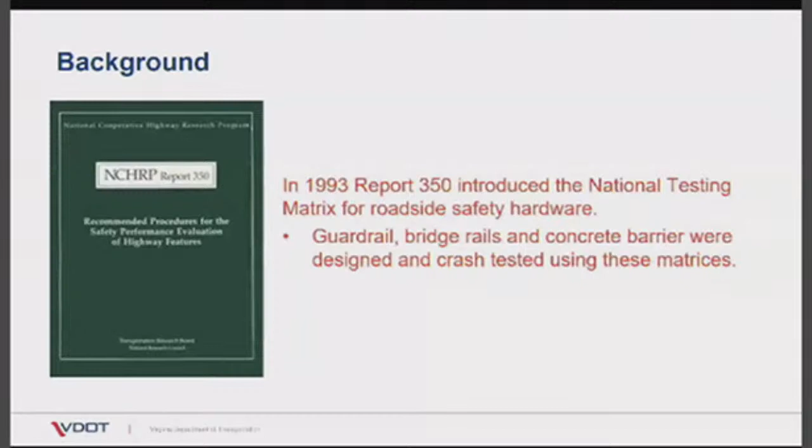VDOT at that time required that all new roadside safety hardware meet this criteria, and that includes our permanent and temporary concrete barrier. Then in 2009, AASHTO's Technical Committee on Roadside Safety, which also updates the Roadside Design Guide, published the Manual for Assessing Safety Hardware, or MASH. This committee is made up of volunteers across the state DOTs.

They relied on a project from NCHRP 22-14, or Improvement of Procedures for the Safety Performance Evaluation of Roadside Features. This report primarily focused on the changes of the vehicle fleet from 1993 to the current day. So if you think back to what vehicle you were driving in 1993 versus what you drive today, for me, I went from a little Honda Prelude to an SUV. It is reflective of the changes to the current fleet and the fact that the percentage of SUVs and quad cab pickup trucks have increased.

This manual used the knowledge gained from testing devices over the years and really advanced the science behind the crash testing. It added additional tests, with changes to the impact angles, including the reduction of the oblique end impacts for gating terminals and crash cushions. It was changed from 15 degrees to 5, and that is probably one of the biggest changes with MASH. The other change was increasing the size and weight of the test vehicles. For example, the light-duty quad cab pickup trucks in MASH are much heavier and higher in center of gravity than the heavy-duty pickup trucks from the NCHRP 350 study.

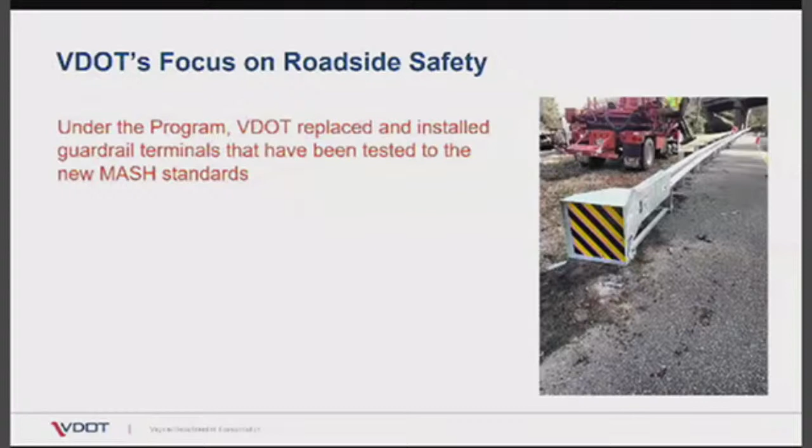Now on to items that are more specific to this audience. In April of last year, VDOT introduced the new standard TBC1, or the Freestanding Temporary Concrete Barrier. As you may have noted already, there is additional reinforcement and changes to the pin and loop connections between the barrier segments. There's also an additional required upstream and downstream anchorages. In addition, there's a requirement for embossing the manufacturing date. And this new design was tested to the MASH test level 3.

Now let's take a look at our next item to update, which is the permanent concrete barrier design. Pictured here is the F-shape barrier with a guardrail attachment. You can see the reduced post spacing in the attachments to stiffen the guardrail system and reduce pocketing where those two systems meet. This F-shaped barrier works by lifting the vehicle center of gravity to reduce momentum and redirect errant vehicles. This was tested under test level 3 under NCHRP and may not redirect the larger vehicles due to the height of the barrier, which is only 32 inches.

This is due to the overhang of those large vehicles like a single unit truck or box truck. In addition, it has a 3-inch lip at the bottom, which can accommodate an overlay, but the multiple slope shapes must be retained in order for it to work as designed.

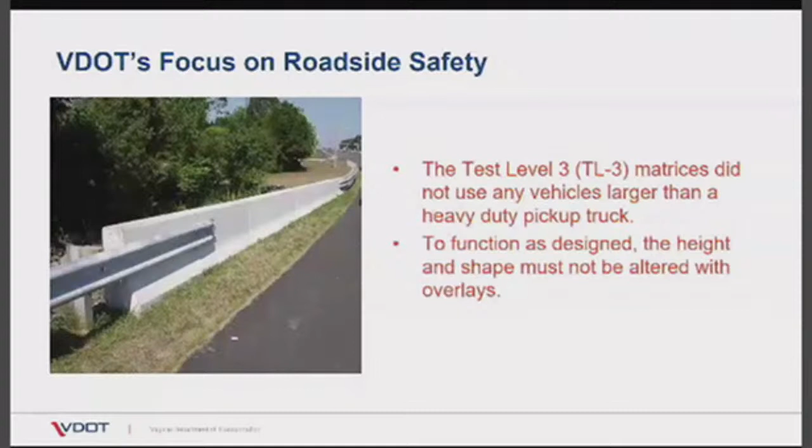So this is a picture of a constant slope barrier at Texas A&M Transportation Institute in College Station. California and Texas developed these constant slope barriers to meet MASH and to help redirect those larger vehicles. The testing that they have done has shown that a minimum height is needed to redirect those larger vehicles. The Texas constant slope is similar in performance to the Jersey shape, and the Caltrans is similar in performance to the F-shaped barriers that we have. There again, this taller barrier helps to resolve the issues with the overhang of those box trucks.

So as a result, VDOT is moving forward with adopting a 42-inch constant slope barrier. This provides protection for the current fleet, but also gives us the additional capacity for those larger vehicles like the single-unit trucks. Another advantage of the single slope barrier is that it maintains functionality even with multiple overlays, as long as the height remains adequate to redirect those larger vehicles. So in reality, it has the potential to redirect large vehicles such as box trucks or single unit trucks and operate at a test level 4.

In general, for high-speed highways, the single slope barrier is most appropriate to limit those rollovers, especially since much of the fleet now has side airbags to help absorb that impact and improve the safety of the occupants. The new concrete barrier standard will replace the F-shaped standards, and the old standards will be sunset at a later date that is yet to be determined. If you have questions or want further information, please feel free to reach out to Chuck Patterson or Matt Cross in our standards division.

I think I'm on take 47 trying to record this. I'm starting to think that it's harder to record than it is to do it live. But nevertheless, we'll give it a go.

We're going to talk about updates that happened in the year 2020 to our office practice and standards.

Part 1 is the preface, Part 2 is the design aids, which we also call the office practice. Then Parts 3 on are various standards. So Part 2, the office practice, has 33 chapters, so there's a lot in that. Today we're going to talk about updates that were made to Parts 1, 2, 3, and 7.

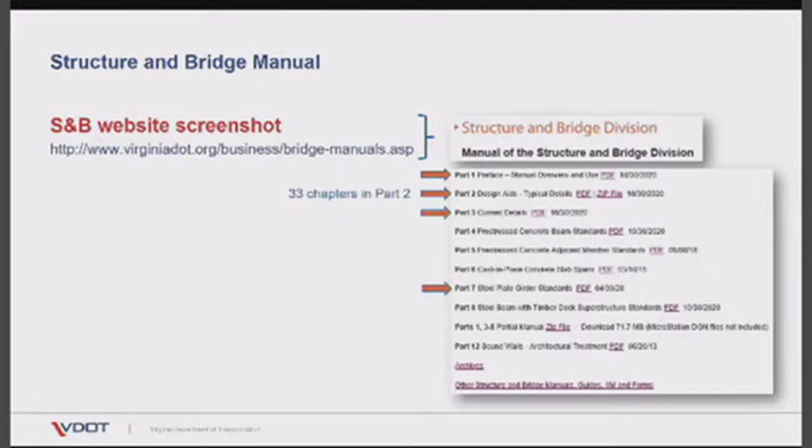Steel or concrete? As you're working on preliminary plans for new or replacement bridges, one of the key questions is, what kind of superstructure can you use? If conditions allow uncoated weathering steel, the Stage 1 report can compare steel options and concrete options. But if conditions do not allow uncoated weathering steel, approval is needed in order to use steel.

So this is a new requirement. It was added in April of 2020 to Chapter 11, the steel chapter. So keep that in mind when you're preparing your report and recommending a superstructure type.

Design waivers and design approvals. Who is the approval authority? This is all spelled out in Part 1, the preface. For design-bid-build projects, some design waivers require state bridge engineer approval or disapproval, and others are submitted to the district bridge engineer. The preface outlines which go to which.

Design approvals generally all go to the district bridge engineers. But new in October of 2020, all items proposed by a concessionaire or design-builder must be submitted to the state bridge engineer. So that is a new requirement.

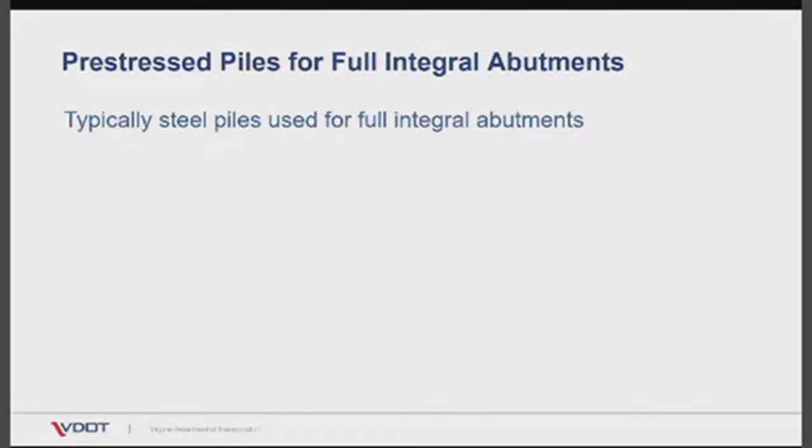Pre-stressed piles for full integral abutments. Typically steel piles are used in full integral abutments. Piles need a little more flexibility in full integral abutments, so that's why the steel piles are normally used. The office practice was silent on the use of pre-stressed piles. It's not that they weren't allowed, we were just silent on it.

So recently we added, in several places in Part 2, some guidance to help the designers think through, hey, will a pre-stressed pile work in this situation, and what are some things to consider?

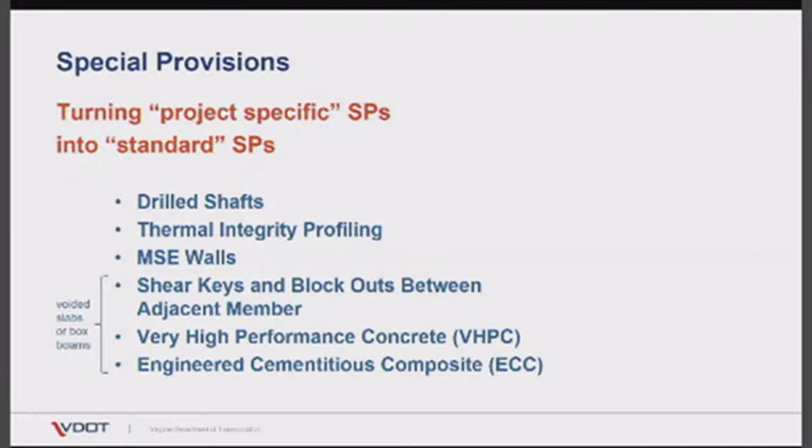Early on, there were several suppliers, but at the moment, there's only one known manufacturer of elasticized expanded polystyrene. There are several that supply and manufacture expanded polystyrene, but we need the elasticized version because it can compress and rebound. Because there's only one manufacturer that we know of, Construction Division and the FHWA consider it a proprietary product. So in 2020, we had to obtain a public interest finding from the FHWA in order to continue using it.

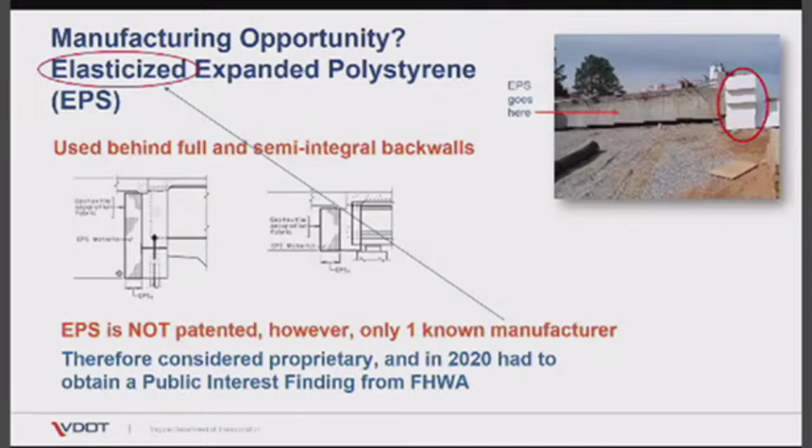So there's your manufacturing opportunity. If someone wants to get into the business of manufacturing this, well, there's very limited competition, and that would be great.

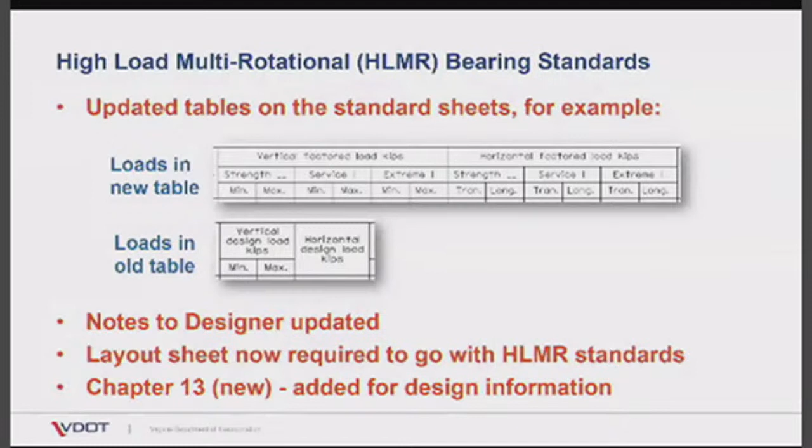Chapter 13, which is a new chapter, was added for some general design information. In April of 2020, we added Chapter 18, Earth Retaining Walls. Right now, the content is mainly focused on MSE walls. It contains the approved retaining wall systems list. This list used to be in Part 11, the geotechnical manual, and Part 11 has been disseminated through various chapters in Part 2.

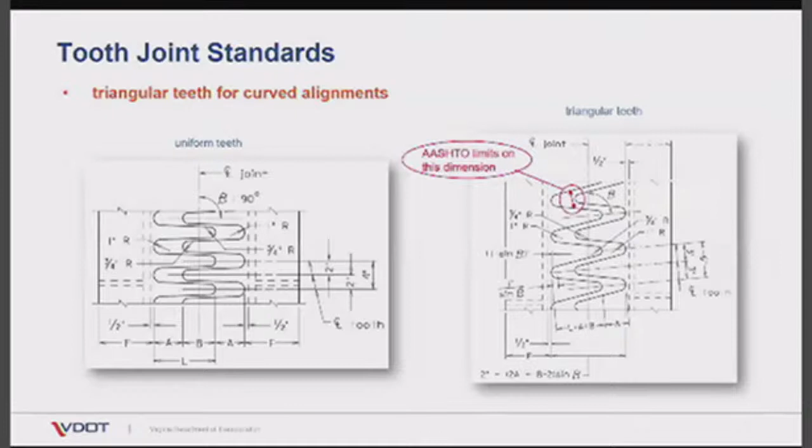One thing you want to pay attention to, though, if you are using the triangular teeth, is that AASHTO has some limits on that dimension circled in red. If you exceed those limits, you're not allowed to use the triangular tooth. Another reason the tooth joint standards were updated is the advent of Virginia abutments and Virginia pier caps. Most tooth joints will be used at either a Virginia abutment or Virginia pier cap, and in those situations, the trough membrane is not needed.

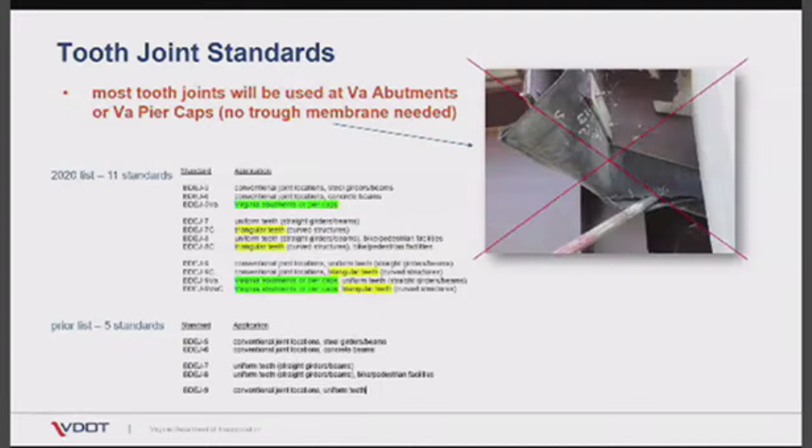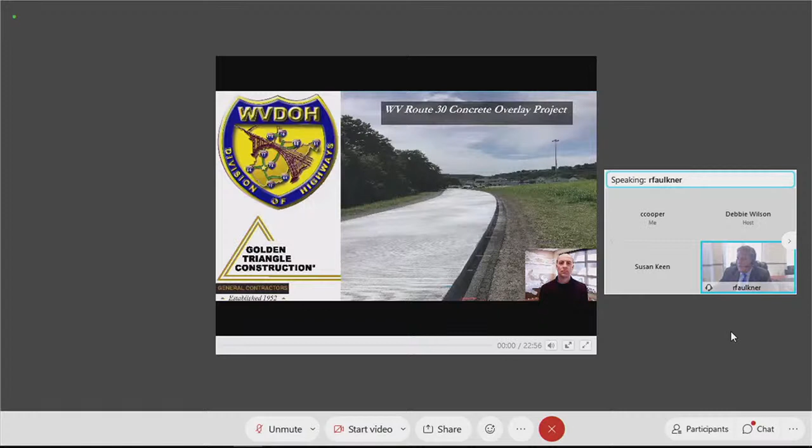Next is the West Virginia Unbonded Concrete Overlay Project, and the speaker today is David Sciullo with Golden Triangle Construction. He's been there for 23 years, from field engineer to vice president of construction. He oversees all field operations in their heavy highway division. He graduated with a Bachelor of Science degree in civil engineering from the University of Pittsburgh and is a licensed professional engineer in Pennsylvania.

Good morning. My name is David Sciullo. I'm with Golden Triangle Construction. Today I'm going to present on the West Virginia Route 30 concrete overlay project in Chester, West Virginia.

This is not a new technology. They've been doing concrete overlays for a long time. They did a few in the 1980s in Pennsylvania, and they've been doing them all over the country. However, in just the last 10 years or so, it's really been taking off throughout the country. And we were happy to be the low bidder on this project.

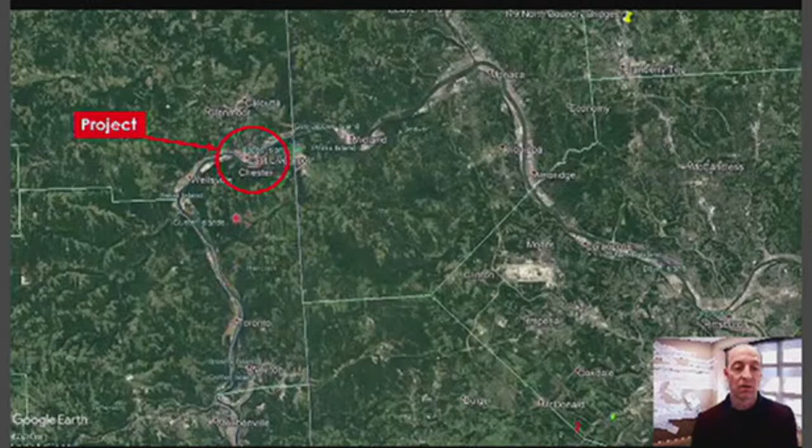The description of the project: like I said before, it's the first one ever in West Virginia. $4.3 million contract. The original schedule was April through August. The whole intent was to get the project done prior to school starting in September. We were still able to do that despite the rainy weather in April. We really didn't get started until May, but we were still able to get the job done before school starts. 20,000 square yards of 7-inch overlay on an inch asphalt interlayer.

4 interchanges, and also Route 2 was involved in the project. There was some preservation, patching on Route 2. There were some variable depth, full depth reconstruction at the tie-ins to the bridge and Route 2 and County Road 30, which paralleled the project. I'll explain that a little later. Minor median work. There was a concrete channel that was rebuilt, and the median barrier was also reconstructed.

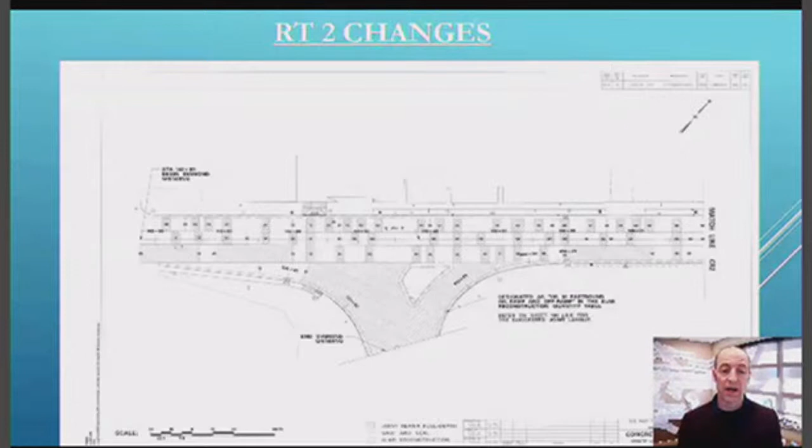So internally, we looked at some things we could do to help the project schedule, change some designs of the project, and approached West Virginia on these changes. The first one was Route 2. Now, if you look at the plan for Route 2, all those hatchings would be patches that needed done on Route 2. Again, there's a lot of patches on a small area of Route 2.

So we looked at it and saw, well, maybe we could reconstruct the whole thing for the same cost as it was to patch the roadway. I mean, the patches look like checkerboards. We thought we could do it. We priced it up. It was attainable. So we approached West Virginia with it and said, hey, we can give you a new road for the same price, and we're going to construct it the same way. Flagging operations while we're in that lane will be done the same way. It's just we're ripping out the whole road and replacing it with a new road, still saving the curb gutters that were planned for the project with some minor patches to those, and give them a new road.

Again, looking at an overview of the road, you have 3 lanes here. You had a parking lane and you had 2 through lanes. So we did them 1 lane at a time. We did the parking lane, maintained traffic on the through lane and the opposite lane. During work hours, we would flag one of those lanes to pave the curb lane, say. And then we'd move our way across the roadway and just keep shifting traffic as we did the work.

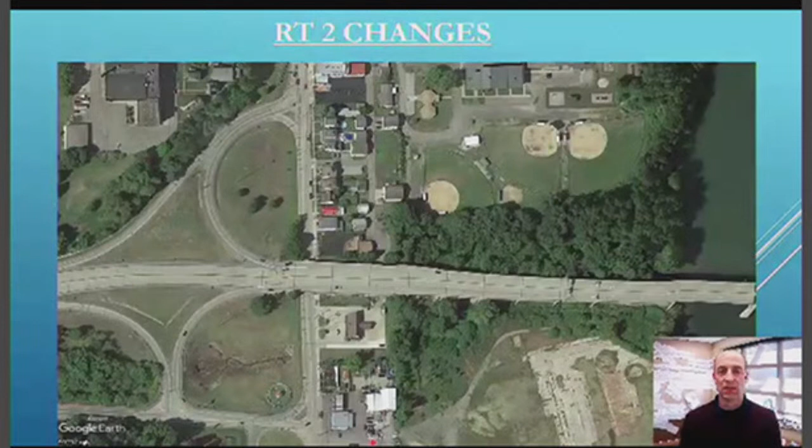Picture of what we did here. So this would be the parking lane. We saved the curbs here. Again, traffic's maintained here while we're working, flagging that lane. Then we'd open this lane up at night when we were done. Again, the curbs were saved. Here's a look at what it looked like when it was done. Again, brand new road for the same price as all those patches. Time-wise, too, it was similar time because the excavation didn't take very long.

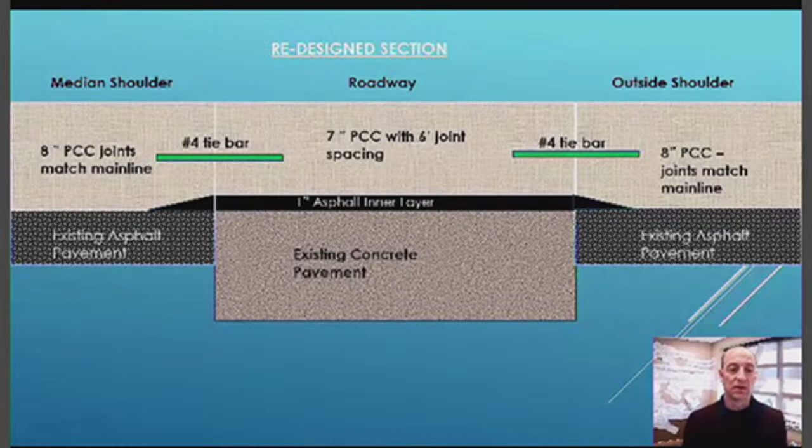Again, we discussed how we could maybe look at changing a few things, and this is what we decided on. Since we have a concrete plant on site, instead of doing the asphalt shoulders, we changed those to concrete for the same price as the asphalt shoulders. All we did was add tie bars to the shoulders and extend the asphalt inner layer, maybe a couple feet, tapered into nothing. Now you got 8-inch shoulders for the same price as 8-inch asphalt. It was a no-brainer for the department, and they accepted that without question.

Another change we made: we looked at the detour and the 9-day closure and how we could make this better. It was a 20-mile detour during those 9 days, not ideal, especially for the locals in Chester. They weren't thrilled about it, but they understood the project needed to get done. So we looked at whether there was another way to do this, maybe somehow maintain traffic while we're working. We've done this in the past doing overlays, maintaining 1 lane each direction.

So we came up with a new detour, a combination of a detour and single lane work. There was a parallel road along Route 2, County Road 30, a very capable roadway to handle the traffic. We looked at detouring westbound traffic onto that roadway and constructing the eastbound lanes using long-term single lane closures. The ramps were still closed per the contract, except the westbound ramps were closed during the detour, which eliminated a couple additional ramp closures. It also eliminated the incentive-disincentive clause, which eliminated some risk on our end but also saved the department money - they didn't have to pay that $90,000, assuming we got done in 9 days, which we still intended to do, though there was still some risk there.

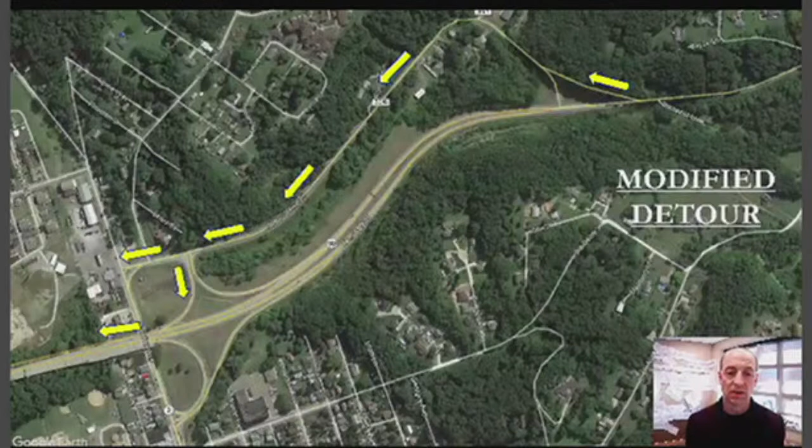So just to go over the construction, primarily overlay work - I don't have much time for anything else, but looking at the overlay itself: the first thing you had to do was go out and look at the existing pavement, determine areas that needed full depth repairs. Normally on a full depth pavement job, you'd look at areas with cracks and do full depth patches on new roadways or on this preservation job.

However, this is a little different. You'll see cracks on the roadway, but if the cracks aren't moving - if the slab has no movement - it's still okay for an overlay. However, if the slab has some movement or faulting, you'd want to replace that slab, patch, or do whatever's needed so there's no movement. Ideally you want a uniform surface underneath the overlay. So you go through, look at the areas, and proof all the pavement - we did it with a loaded tri-axle to see if any areas needed full depth patching. Very little actually needed it. Also, areas with potholes or small repairs needed fixing - you'd use a fine asphalt sand mix or cement grout to fill those depressions so you'd still have a uniform section underneath that inner layer.

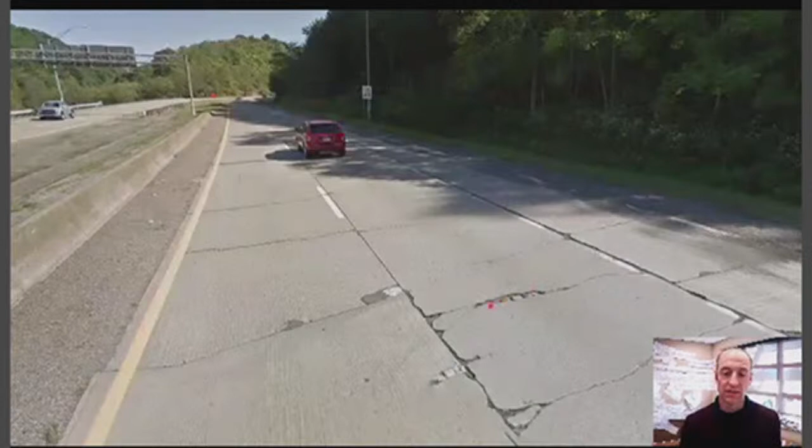So what you would do is clean these out very good and either use that asphalt sand mix or concrete grout, which we elected to do because we had a batch plant on site, so we could batch the grout ourselves. We'd go through there, clean them out, and put grout in prior to doing the asphalt interlayer.

Another look here, you have some areas here. Again, you're not touching these cracks, just filling in the holes. I was trying to search for some pictures of that grouting operation and didn't really have any good ones to share with you, apologize for that.

So looking at the asphalt, just again typical 1-inch asphalt placement, no different than regular asphalt. So you place that 1-inch interlayer. Then on a slip form process, just like regular concrete, you're placing the concrete in front of the paver, placing a 7-inch overlay. We extended this asphalt 1.5 foot or so beyond the limits.

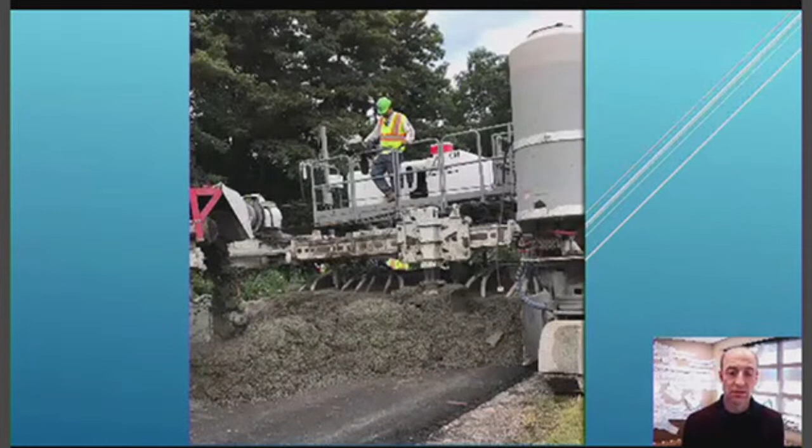Here's another view of it. And here we did stringless paving. You can see the prism here. I'll explain that in detail a little bit later.

Get another view of the paving. This would be westbound, here's the eastbound lanes. You can see the edge of the asphalt on the right side here.

This guy here, most important guy right here, is the dump guy. He has to make sure that he doesn't overload the paver. Again, critical to get uniform head in front of the paver to maintain uniform pressure in the front, so you have consistent, smooth concrete coming out the back. He's communicating with the paving operator to make sure he's not overloading the paver, and you don't want to starve the paver either for concrete, but making sure you have consistent, even head in front of the paver.

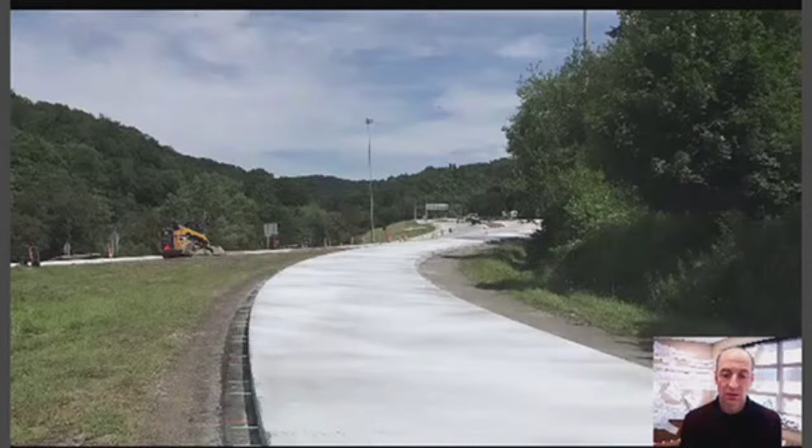Here's a look at after paving, we got some excellent rides on this, 50s, 60s on this overlay, minimal grinding just up at the very ends where we did the tie-ins. We had some grinding on some handwork sections at the very ends of the job. Again, you could see the asphalt interlayer went a little wider here.

And the tie bars, so the tie bars again are spaced 2 feet apart on a 6-foot joint. Here's these blue marks, if you can see, are the joint marks, and you got 2 bars per bay. So you have a 6-foot bay, 2 bars per joint, 2-foot distance in between them to keep away from the transverse joint.

Another look at construction. Another look right after paving prior to spray curing.

Here's a look at the 4-foot shoulder on the westbound, that'd be the westbound off ramp to Route 2. I talked earlier about the transition to existing.

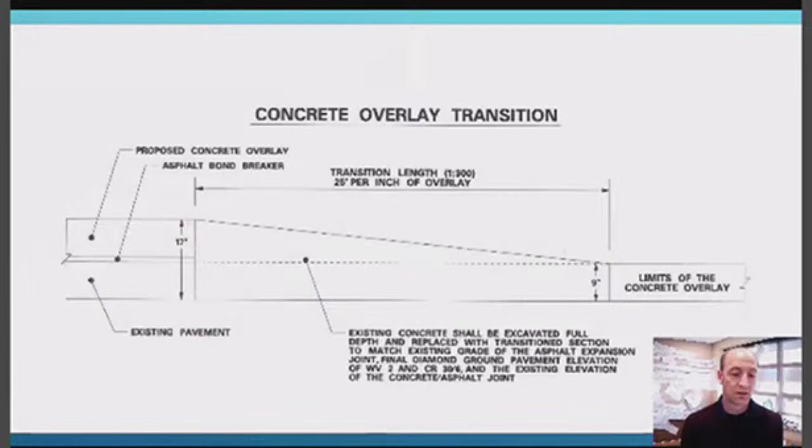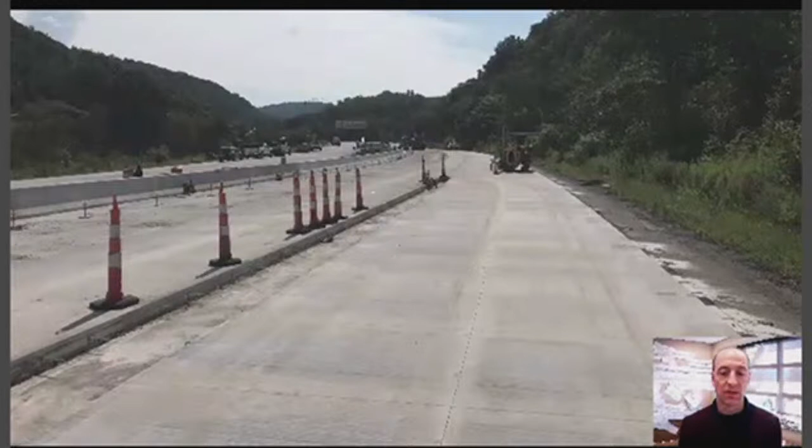This is looking eastbound from the eastbound on-ramp. This is when we were paving the barrier. You can see the median barrier here. Again, this is asphalt underneath the overlay here.

I look at a slip form in the barrier. Here's this is looking eastbound from the westbound side. This is the on-ramp from Route 2 heading west. The bridge is right behind me here.

Here's a look heading westbound. Here's the westbound off-ramp. That's the bridge that takes you over to Ohio.

Next question: is the asphalt interlayer used as a drainage layer for water to wick through? I don't believe it is. The asphalt layer is almost like a wearing course, 9.5 millimeter. Now I know there's some discussion about water seeping in there and what effect that has on kind of washing out some of that asphalt interlayer, maybe some stripping. So you have to have an anti-stripping agent in that asphalt, but I'm not aware that it's used as a drainage layer.

The question: 6x6 panels were used. They were on a 7-inch overlay. And were dowels used for load transfer? They were not. There were no dowels. There were tie bars used on the longitudinal joints, but no dowels on the 7-inch pavement. It was just contraction joints. They were just green cut, not sealed. No sealing on the joints in West Virginia.

Another question came up. Was this a design bid build? And is this type of project more ideal for design build? Sounds like numerous changes. To answer the first part, it can be design bid build if it's designed properly. However, the MPT becomes a factor as far as design build. We prefer doing design build MPT projects because every contractor has a different way of doing things, based on what their skill set is and what equipment they have. So we thought it was better with our skill set to change it up.

But I think West Virginia was new to doing concrete overlays and actually needed some assistance, and we provided that to them. I think they were very grateful; there was something new they were trying here and making some changes on the fly, getting some help from the Concrete Paving Association as well, which I think helped the department. I think it was a good team effort by both. They were eager to do it. We were welcome to help. I think it was successful.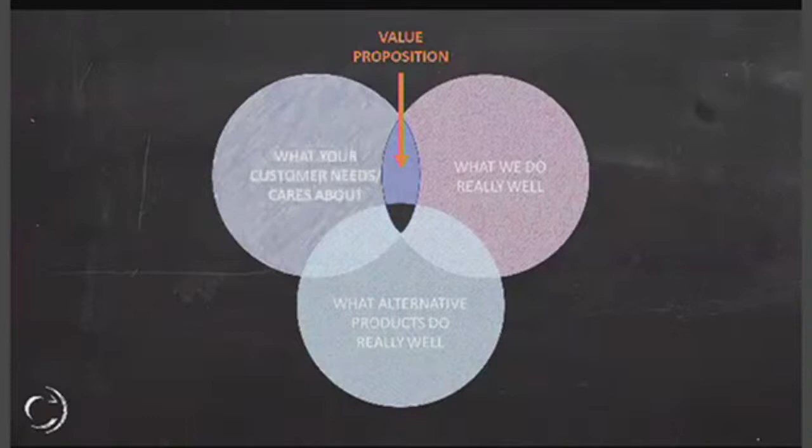We only have 25 minutes together, so I won't waste your time discussing what alternative products do really well. Even those of you not in the pipe industry have heard their claims several times. They're lightweight, they consider themselves sustainable, they have a pretty good joint, and anything concrete pipe can do, they can do better. So let's take a look at just what concrete pipe can do. First of all, concrete pipe is sustainable, but it's not just sustainable, it's also resilient. Secondly, reinforced concrete is strong. Third, reinforced concrete pipe provides proven, consistent hydraulic performance. And finally, reinforced concrete pipe has a proven track record.

Sustainability can be defined as the ability to exist continuously. While many people primarily associate sustainability with environmental considerations, the core concept of sustainability encompasses much more than that. A commonly used definition of sustainability is meeting our own needs without compromising the ability of future generations to meet needs of their own. If a system is sustainable, it will theoretically remain operational without negative effects to its own functionality or the systems around it throughout the rest of time.

Traditionally, it can be compared to a long-term analysis that evaluates the foreseeable future and takes into account our intent for society to be functional for our great-great-great-grandchildren and beyond. That makes sustainability an especially important term and an essential consideration when it comes to infrastructure. Traditionally, sustainability is categorized by societal, environmental, and economic sustainability. These categories encompass what is referred to as the three pillars of sustainability, the triple bottom line, or people, planet, and profit.

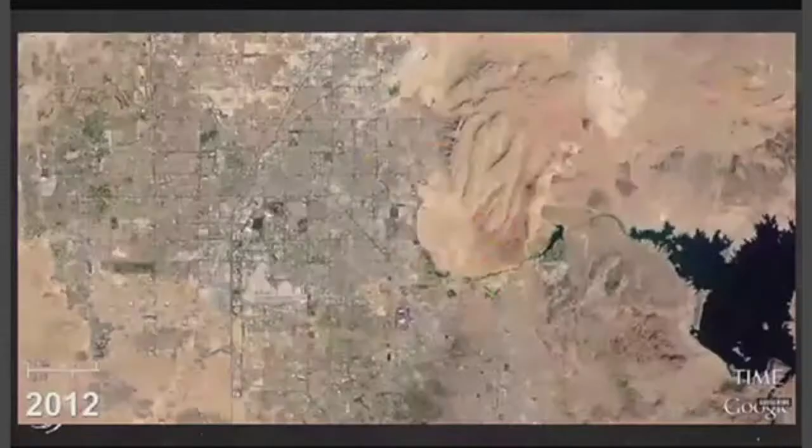Infrastructure sustainability must provide dependable functionality while also considering the environmental implications. For infrastructure to be truly sustainable, it must also achieve economic sustainability, meaning it must be economical to construct, but also to maintain. Economic sustainability in infrastructure ensures that as a community grows, it will retain the economic resources necessary to build new systems and maintain and replace existing systems at a manageable rate.

Look at this time lapse of the Las Vegas region in Nevada. The community growth is evident both on the street level as well as from the 30,000-foot view. For a given system to be sustainable, designers and decision makers must take life cycle cost into account.

Life cycle cost analysis is a methodology that enables engineers, designers, and decision makers to better understand the economic impacts of infrastructure decisions over time. To achieve economic sustainability, engineers and policymakers must account for all economic costs over the lifetime of a project and utilize the right tools and approaches to do so.

Unfortunately, according to ASCE, only 59% of government agencies across the U.S. employ some type of life cycle cost analysis to maximize their investments, and even then they rarely extend into storm sewer systems and culverts. If you consider that storm sewers and culverts are still a significant portion of project budgets and designers are presented with many material options for drainage pipes, it is important that life cycle cost analysis be considered for this aspect of infrastructure as well. In order to perform a true life cycle analysis, the designer must consider the initial construction cost, the maintenance costs, and the service life of the product.

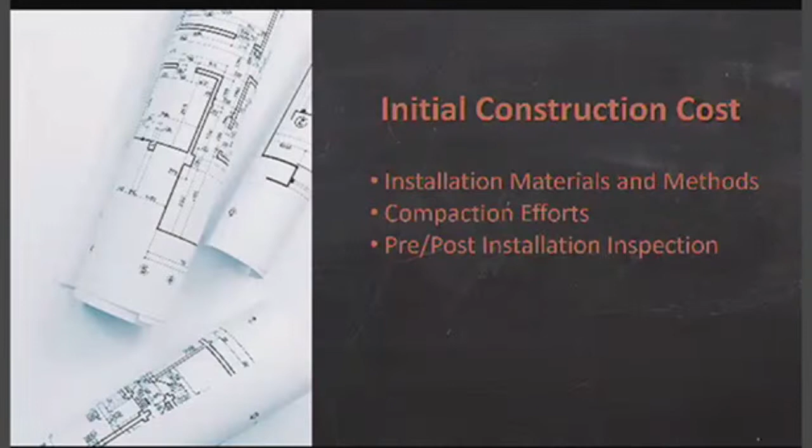When we look at the initial construction cost, we consider the installation of materials and the methods used. We should consider the compaction effort necessary to achieve a proper installation for all different types of pipes and culverts. And of course, the cost of pre- and post-installation inspection must be accounted for.

When considering maintenance costs, local, real-world experience with pipeline maintenance expenditures may be the best indicator of future maintenance costs for a proposed new pipeline project. Proper construction inspection will result in lower maintenance costs over pipeline service life. Without proper inspection, an improperly installed storm sewer or culvert will likely require more maintenance than it would had it been properly installed initially.

Agencies should differentiate between estimated future routine maintenance costs and rehabilitation costs. Some pipeline rehabilitation projects, while pricey, may effectively extend the service life of the pipe beyond the original service life estimate. If an agency tracks the actual lifespan of culverts and storm sewers in a local region, a strong case can be made for using that number for service life and life cycle cost calculations.

When a storm sewer or culvert is replaced prior to the end of its service life, engineers should evaluate the removed pipe sections for possible reuse in either the replacement pipeline or another pipeline project. Resetting older, undamaged storm sewer and culvert pipe is a great way to increase the pipe's overall value. This reuse should be considered in life cycle cost equations.

Pipe manufacturers' service life claims should be carefully weighed against actual user experience. If possible, you should look for third-party sources that confirm or refute service life claims. The National Cooperative Highway Research Program, the NCHRP, has published the life expectancies for different materials for most conditions. Reinforced concrete pipe has a proven history in many regions across the country, and there are documented cases of concrete pipe that's been removed near their 100-year expected service life in excellent condition.

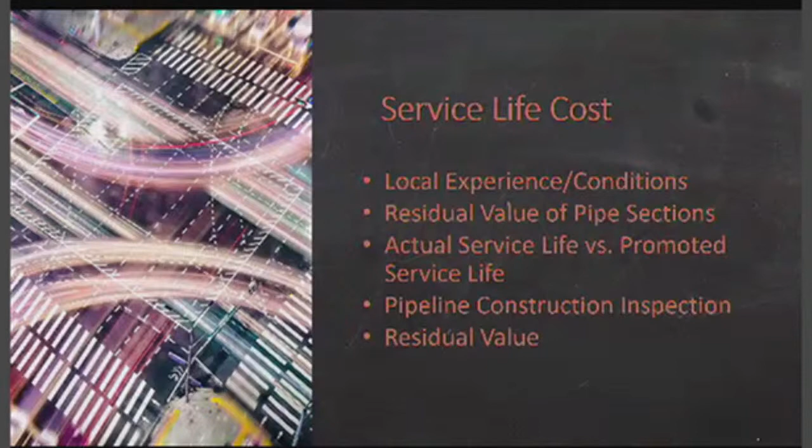A crushed or squashed storm sewer pipeline could in theory last hundreds of years, but provide little to no water conveyance capabilities. And it's important to remember that a pipe's service life may extend beyond the project design life, especially in the case of concrete pipe. Concrete pipe is durable enough that in many cases at the end of life for one project, it may still be acceptable to remove and reuse that pipe on another project.

Because of the present threats that our infrastructure systems face, sustainability should always be coupled with resilience. Infrastructure that is sustainable and not also resilient will inevitably fail because it cannot adequately resist disturbances and will require frequent repairs or replacement. Resilience should thus be seen as a necessary supporting element of sustainability. As the U.S. Resiliency Council said in 2016, many LEED certified buildings in Superstorm Sandy were designed to have a low impact on the environment, but not for the environment to have a low impact on them.

And, as Rocky said, it's not about how hard you can hit, it's about how hard you can get hit and keep moving forward. That is resilience. Resilience is an especially important consideration for infrastructure systems because, by definition, infrastructure is the core of how our entire society is able to function safely and effectively. Ensuring resilience is a priority when designing infrastructure helps to ensure that the systems we depend on every day, whether it's buildings, transportation, water supply, drainage, or some other function, will stand strong in the midst of adverse events.

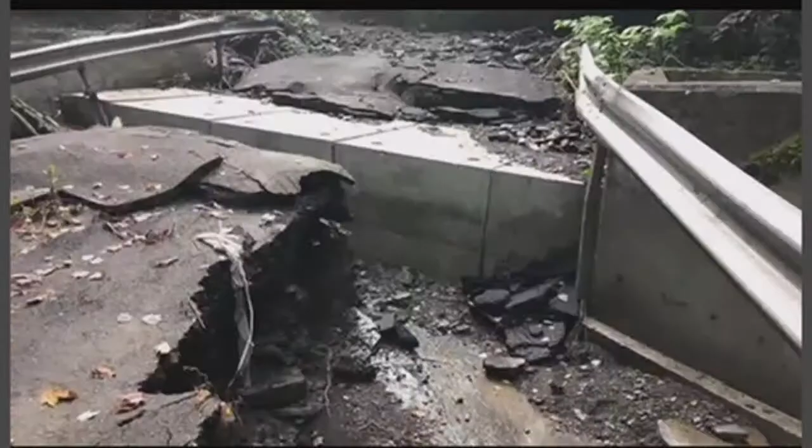Not only does this reduce the inconvenience and safety concerns associated with the loss of critical infrastructure function, but resilience is also a significant long-term cost-saving mechanism. According to a report published by the World Bank and the Global Facility for Disaster Reduction and Recovery, $1 invested in more resilient infrastructure would result in $4 of long-term benefit over the expected life of the infrastructure. In addition to that, FEMA has found that every dollar spent on disaster mitigation beforehand saves society $6 in the future. Put another way, infrastructure systems that are not designed with resilience up front will end up paying the price down the line.

Let's shift gears a bit and take a close look at the strength that reinforced concrete pipe provides. In order to really understand the strength of a pipeline, you need to also understand the strength provided by the system. In this case, the system we're looking at is the soil pipe system. When we install rigid pipe in a trench, the pipe itself is much stiffer than the surrounding soils will ever be, regardless of the amount of compactive effort placed into the backfill.

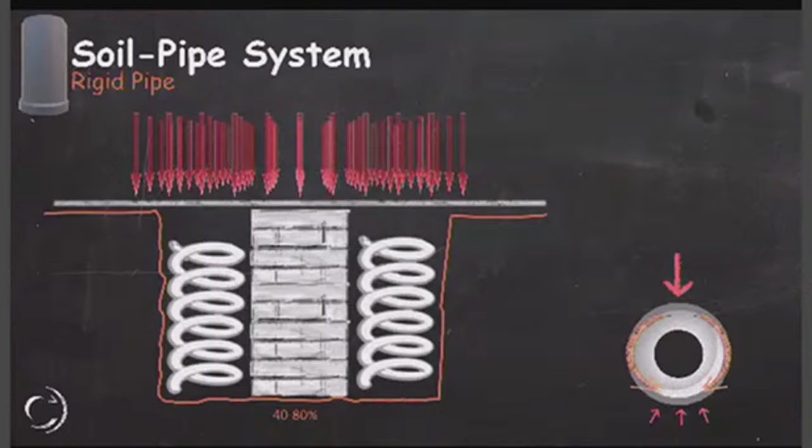As this newly installed soil pipe system is loaded, the soils on either side of the pipe will consolidate slightly, and we therefore represent them as springs in this drawing. The concrete pipe itself is so strong that it provides 40 to 80% of the system's strength. As the pipe is loaded from above, the rigid pipe transfers the load through the pipe wall and down to the foundation of the trench. As those soils consolidate over time and through loading, it's interesting to note that rigid pipe actually attracts load due to the friction forces within the soil. So when we design a concrete pipe installation, we must account for the added loads caused by soil consolidation and friction forces.

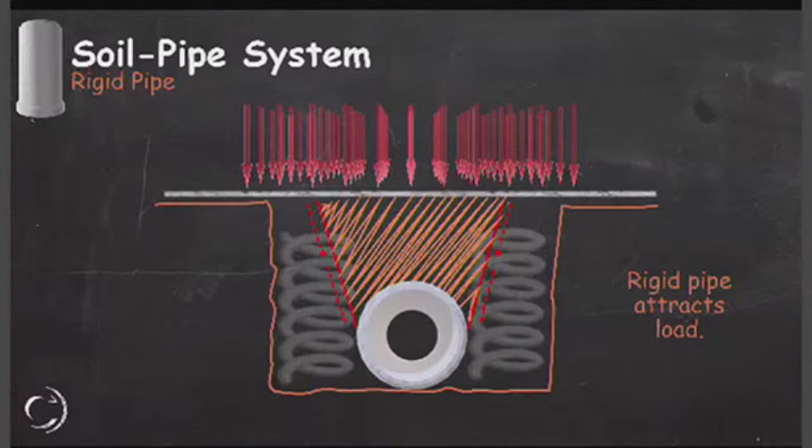If we do the same exercise with a flexible pipe and soil system, the drawing is reversed. No matter which type of flexible pipe we use, it will always be less stiff than the soils on either side. In fact, in this system, a plastic pipe would only provide between 5 and 10% of the system's strength. In order for the system to achieve full strength, the embedment above the pipe must lock into an arch that helps to distribute the load. As the pipe is loaded, flexible products are designed to deflect and therefore push out on the sides of the trench as well as the foundation.

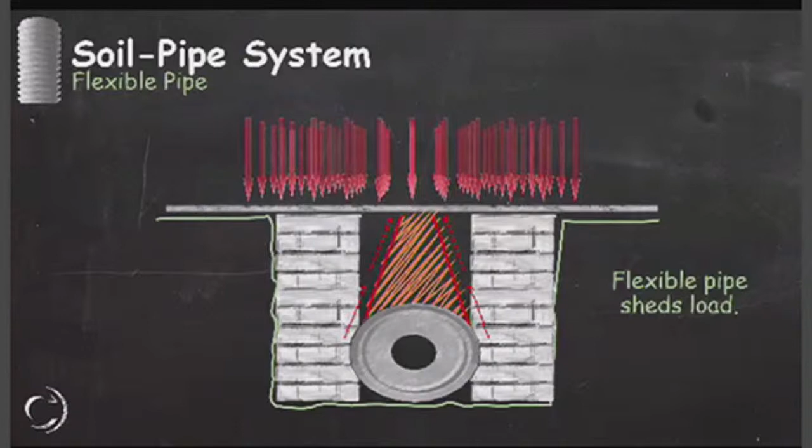In the flexible pipe soil system, if the soils above work to form that proper soil arch, the flexible pipe is able to actually shed load due to those same soil friction forces that attract load to a rigid pipe. So how do we verify the strength of concrete pipe? If it's attracting extra load, we need to make sure that it is strong. Well, most of you know we use the 3-edge bearing test. So let's take a quick look at that.

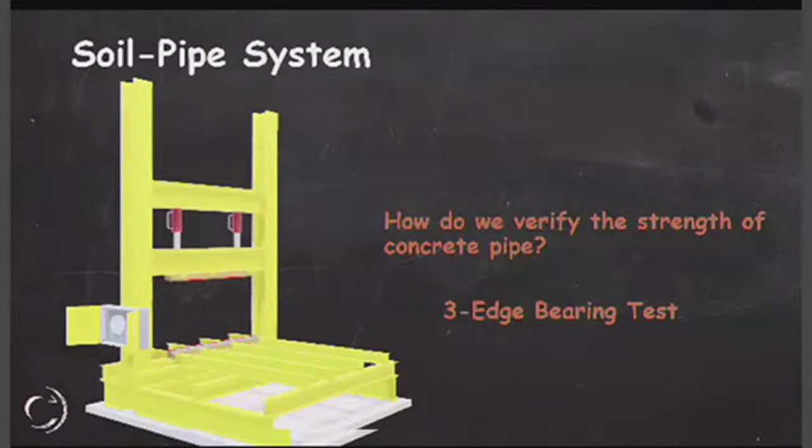The 3-edge bearing test is not very originally named. It simply has 3 bearing strips that help to support the pipe and apply the load. This loading situation, without any soil support around the pipe, is the most extreme loading that the pipe will see in its service. As the load is applied by hydraulic cylinders above, the pipe wall is forced into tension and compression. The tension zones are shown here in red, compression are shown in blue.

This cutout gives you a closer look at how and why the pipe wall is placed into these zones. If you look at it as a simply supported beam on each end with a centered line load, we can see that the bottom of the beam, or the inside of the top of the pipe in this case, will experience tension, and the top of the beam, or the top of the pipe wall, will experience compression.

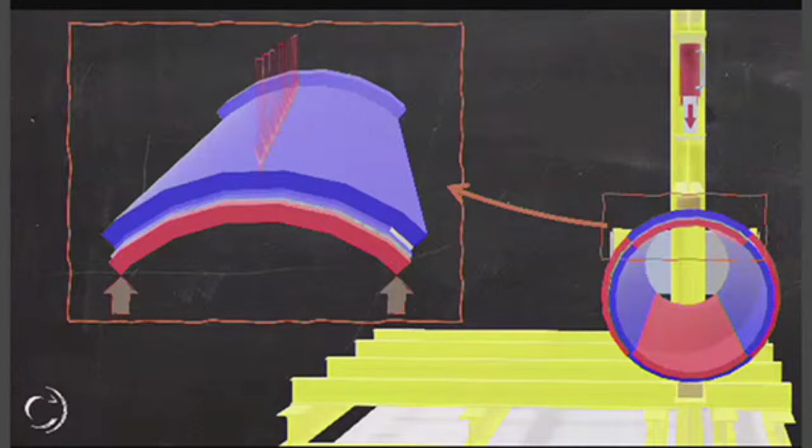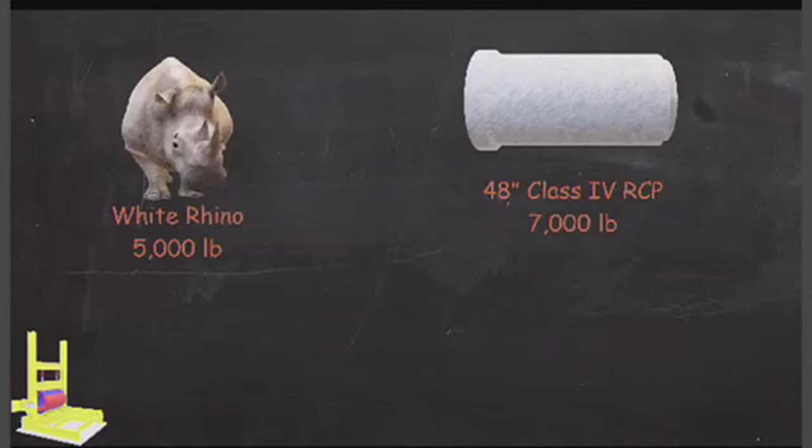So just how much strength is built into a typical piece of concrete pipe? Well, let's do a quick calculation. For example, the average white rhino bull weighs approximately 5,000 pounds. A similarly sized 48-inch Class 4 RCP comes in at around 7,000 pounds. The D load, or design load for that class of pipe, is 2,000 pounds per foot of diameter per foot of length. And the ultimate design load for that class of pipe is 3,000 pounds per foot of diameter per foot of length. Now, if we do the math, that means we need to test this piece of pipe to 64,000 pounds service load and 96,000 pounds of ultimate load. Now, that's a lot of weight.

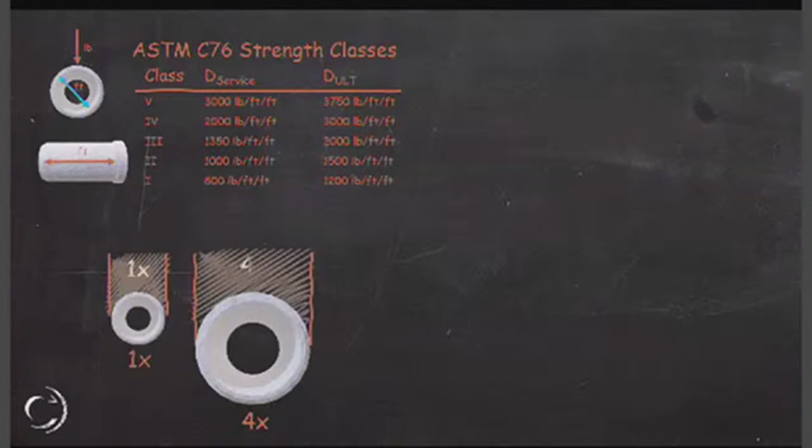If we look at a 12-inch Class 4 and the corresponding soil load over top of it, and a 48-inch Class 4 with a corresponding soil load above that, remember that's the pipe that can hold 19 rhinos, we see that the 48 is actually 4 times as strong as the 12-inch. And that's actually true right down this entire chart. The 144-inch pipe is 12 times as strong as the 12-inch pipe.

That makes sense. The pipe span is larger, so it sees more soil load and loading, and therefore it must be that much stronger. The same cannot be said of alternative products. They actually decrease in stiffness, or at best stay the same as their diameters get larger. That reduction places even more risk on the contractor's shoulders to ensure a proper soil pipe system has been designed and built.

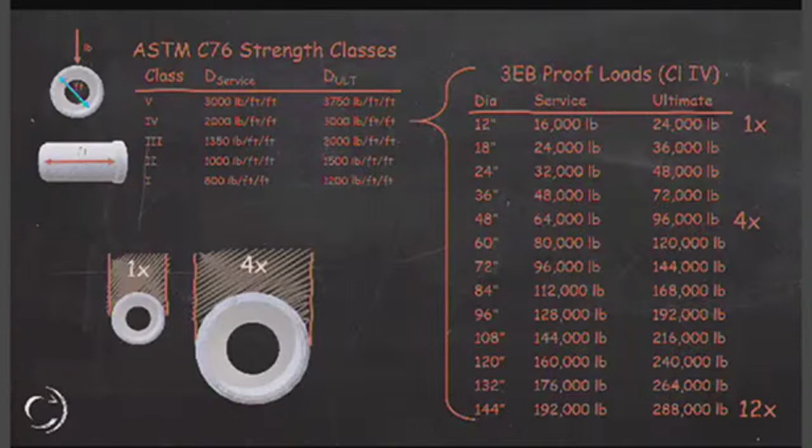Switching gears again, the hydraulic performance of concrete pipe is tried, true, and consistent. One of the perks of using a rigid material is that the roughness coefficient of that material does not change substantially over time. Provided the pipe was properly installed, we can assume the Manning's n value to be the same number on day 1 as it will be on day 36,500. Again, the same cannot be said for the competition.

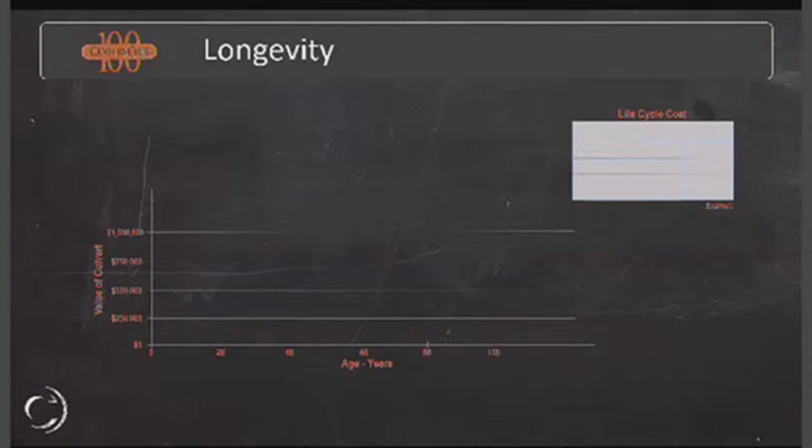Now let's move on to longevity. It's more than just an industry talking point. As I mentioned earlier, it's also an economical consideration. If we compare two culverts, let's say pipe A and pipe B, you can see how the difference in longevity makes for a much different total life cycle cost.

If pipe A costs $1 million to install, but it degrades quicker than its design life of 100 years, it will need to be removed and replaced at a certain value, and that new cost will be another $1 million. Pipe B, on the other hand, has a much longer design life and survives even longer than the 100 years. While the initial cost of pipe B may be 15% higher than pipe A, the fact that it can stay in the ground for 100 plus years makes it a much better choice.

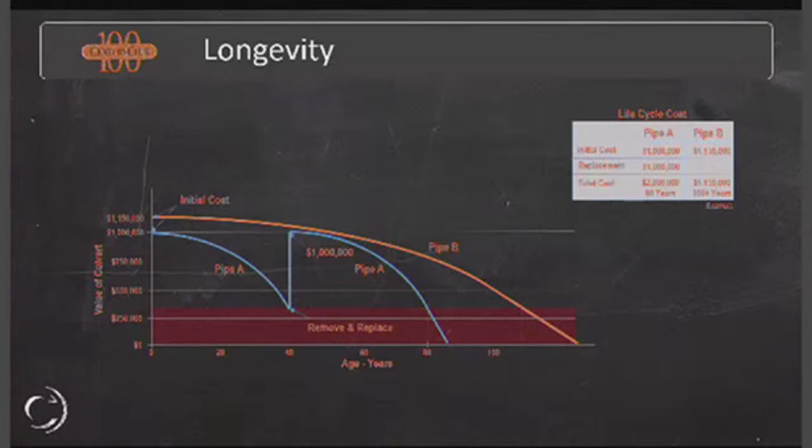So now, in the question and answer session, I'd be interested if you want to add some comments about other items that maybe I missed on what concrete pipe does well, or maybe even some items that alternative products do well. For that matter, if you'd like to add what the customer or the agency needs or wants, that would really add to our discussion. I hope you've enjoyed the discussion on the sustainability, resilience, strength, hydraulics, and longevity of concrete pipe.

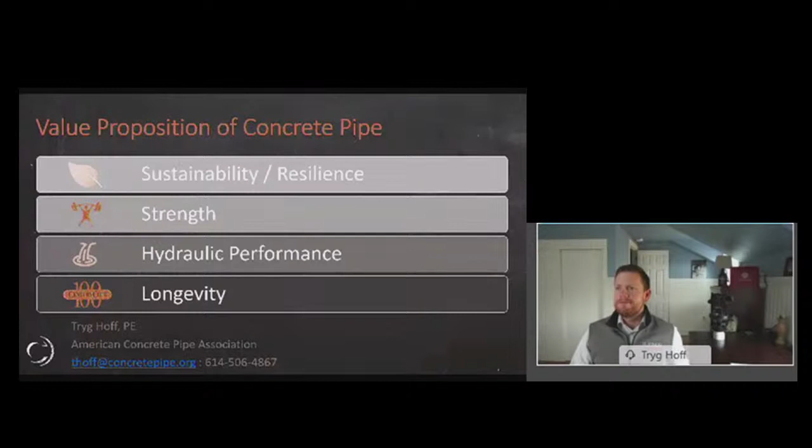Our next session is the new Frederick Douglass Memorial Bridge in Washington, D.C. The speaker is Ken Butler with AECOM. Ken is the Chief Bridge Engineer for AECOM's North America Complex Bridge Practice. His responsibilities include leading complex bridge projects as either Technical Director, Bridge Lead, or Project Manager, and supporting project execution for all complex bridge projects.

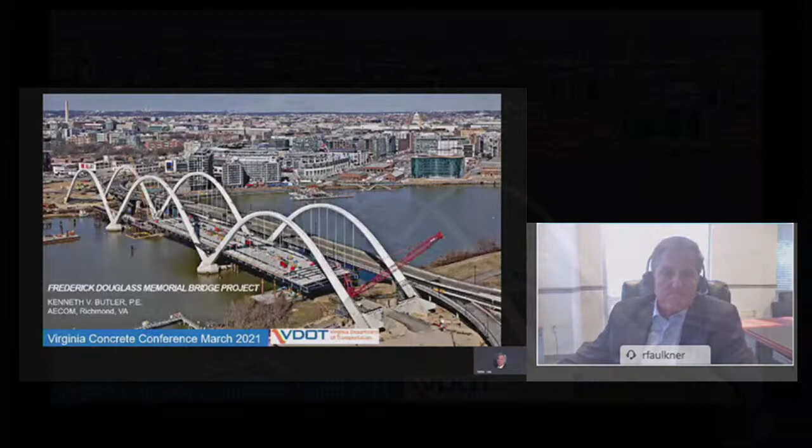Hello, my name is Ken Butler. I'm the Chief Bridge Engineer for AECOM's Complex Bridge Practice. I'm serving as a design manager on this project we're going to present today, the Frederick Douglass Memorial Bridge Project. It is located in Washington, D.C. It's a $441 million design-build project for the District Department of Transportation. South Capitol Bridge Builders is a joint venture with Archer Western and Granite Construction Company, and AECOM, we're their lead designer.

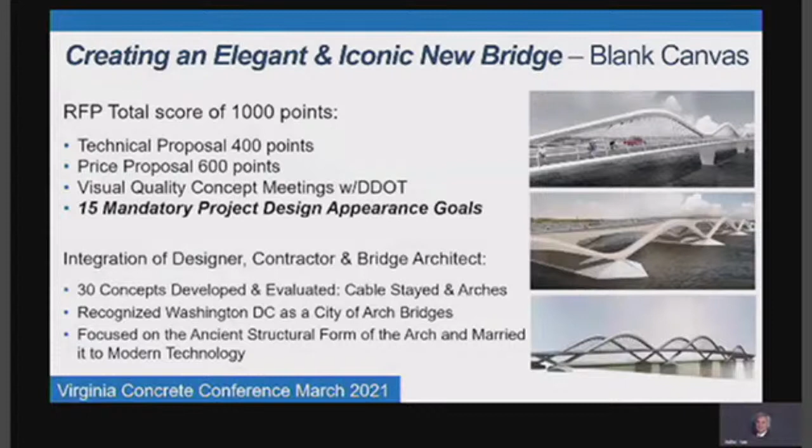Ultimately, we really recognized Washington, D.C. as a city of arches. So we focused on that ancient structural form, but we wanted to marry it to modern technology. A few of the things we did, some of our guiding principles.

We wanted slender, we wanted open. We didn't want heavy arches. We wanted unbraced arches across the top, so parallel arches. We wanted to maximize the height, so we exaggerated the height.

In Washington, D.C., there's a guideline: you cannot construct more than 114 feet above street level. So basically we took 114 feet above the deck level. The 54 feet to deck level is generated out of the navigational envelope, which is 150 feet wide by 42 feet high. That gives you, with the superstructure depth to 54 feet and then 114 above it, so we exaggerated the heights of the arches up to 168 feet.

We also wanted to minimize the number of piers in the water. We were allowed by contract 4 piers in the water, minimum spans of 300 feet, but we wanted to stretch these. So we went with two piers in the water, and that's how we came up with this 453, 540, 453 span arrangement. The architect also really wanted the arches to touch down on the river.

They wanted the feeling of sort of skipping a stone across the river. And then the contractor wanted waterline footings, as you can imagine, to save on cofferdam construction. So we had a combination of the contractor's viewpoint, the engineer's design viewpoint, and the architect's.

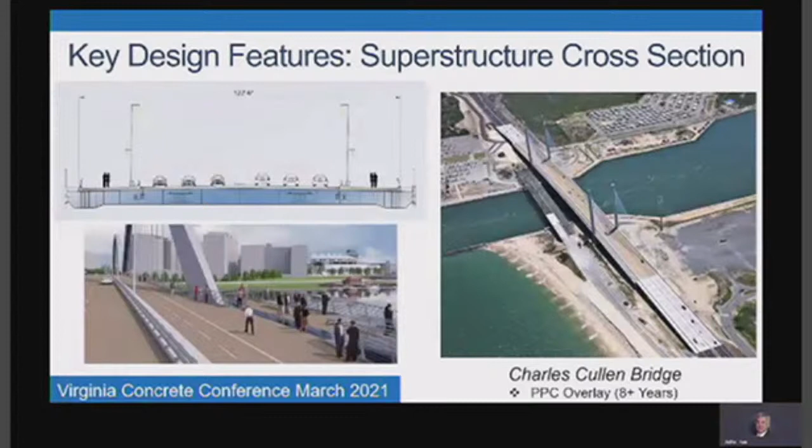It's the second time we've used it on a complex cable supported structure. The first time was in the Charles Cullen Bridge in Rehoboth Beach, Delaware. And this project, very aggressive environment right on the Atlantic Ocean, this overlay has been in place for 8 years and is performing very well.

Just to get you oriented with the framing system, you can see the concrete V-piers here. We have longitudinal edge girders, these 72-inch web steel plate girders, and transverse floor beams running at 12-foot centers. Every other floor beam, so at 24-foot centers, is cable stay supported.

So the deck panels themselves are right around 11 feet wide by 28 feet long. The gray shading represents the precast deck panels, which are 10 inches thick. The yellow shows the cast in place concrete stitching, or closure pours. The belvederes, or overlooks, at each V-pier are also cast in place.

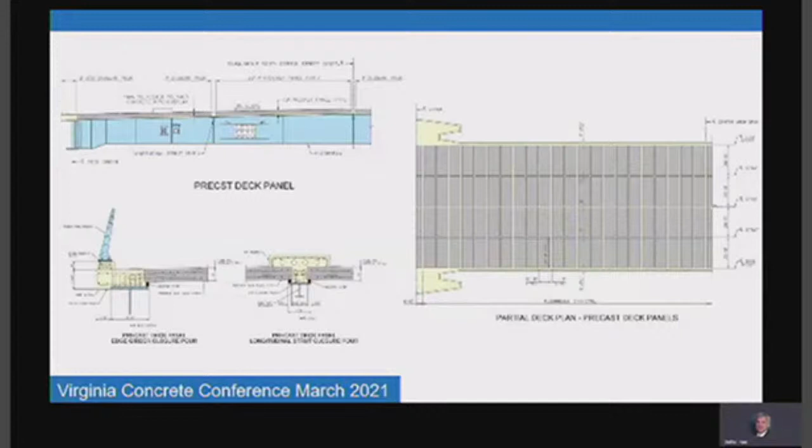A couple things to highlight on the precast concrete deck panels. For Frederick Douglass, they're 10-inch deep panels, and we used a combination of stainless steel and epoxy coated reinforcement. The hairpin bars across the longitudinal closure joints are stainless, while everything else, including the hairpin bars across the transverse joints, are epoxy coated. The joints are 6,500 PSI concrete, but the panels are 5,000 PSI concrete, plus a 1-inch overlay on top. We went with this combination to ensure a 100-year serviceability life.

We'll talk about what we had to look at in that regard. In contrast, we were also designing and building the Arlington Memorial Bridge at the same time, right around the corner on the Potomac River for Federal Highway Administration. For this project, Federal Highway Administration's performance specifications dictated two things: all stainless steel reinforcement, and ultra high performance concrete closure joints. Their UHPC joints were 21,000 PSI, fiber reinforced, versus the 6,500 PSI concrete on Frederick Douglass. As a result, their closure joints are 6.5 inches versus our 11 inches and 16 inches. I put this up here because, as designer of record for both bridges, I think it'll be a good case study over the years of how they perform.

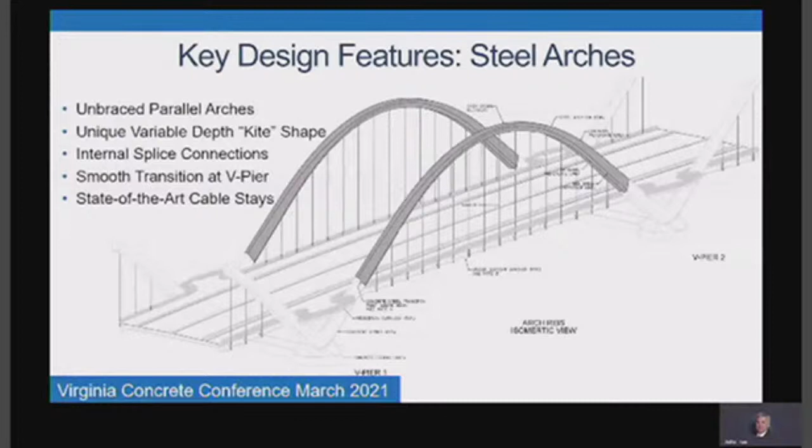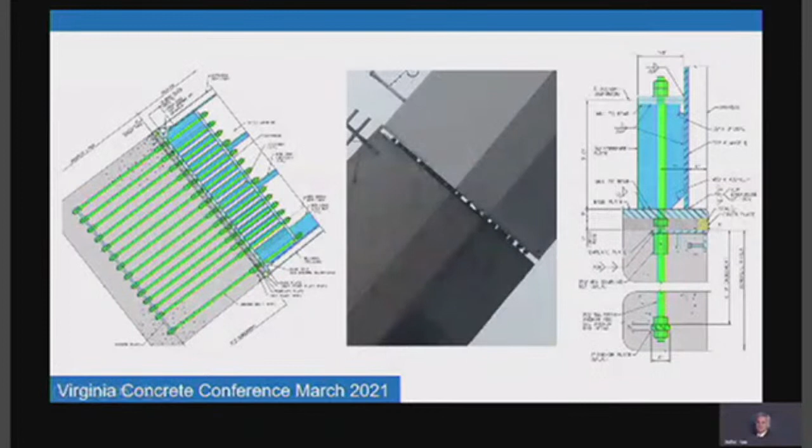So now we're going to talk about the concrete V-piers themselves. One of the things we were limited by in the performance specifications was 2 expansion joints, one basically at each abutment, the beginning and end of the bridge. So we had to accommodate the thermal expansion and contraction of the bridge through the V-piers. These are not tied arches, they're springing arches, so we had to accommodate the full movement, also in consideration of these belvederes, these overlooks. So how did we do that?

We basically created these strong backs on the inside face of the arch piers. Bearings are here, and the longitudinal edge girders run in this direction on both sides. Basically the bridge moves like a glide chair in between the V-piers, and we support it to the center of the arch by these outriggers. The transverse floor beams extend out beyond the edge girders and provide the anchorage housing for the cable stay, then support it off the arch.

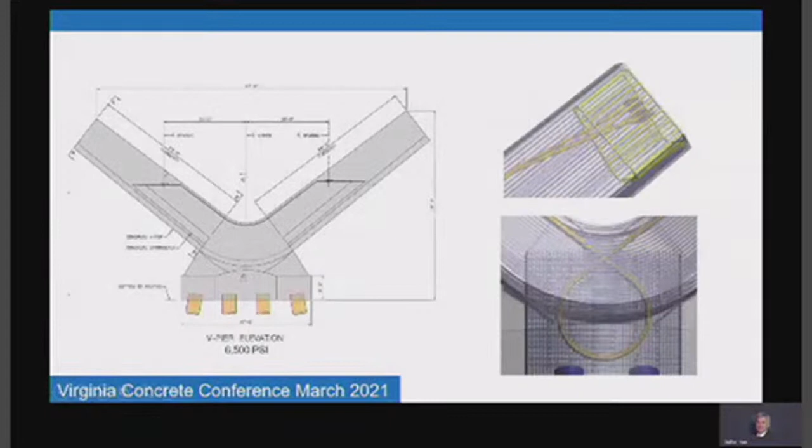The concrete V-piers themselves are 6,500 PSI concrete, post-tensioned, very large—113 feet wide by 70 feet tall. You can see the inside strong back in this location, center line of bearings here. In this view, you see the 2.5-inch diameter galvanized anchor rods cast into the top of the V-pier, and the post-tensioning anchors in the top. So bringing you over here, it anchors in the top, post-tensioning runs down, loops through, and then anchors in the top. Here, it's tied into the footing, as you can see in that view.

Looking at the internal post-tensioning, we have a combination of both internal and external—internal highlighted in green, external highlighted in orange. The internal is 8 27-strand tendons, 0.6-inch diameter, double-end stressed to ensure a good uniform force throughout the V-pier, housed within grouted corrugated plastic duct. The external post-tensioning is used for serviceability—it's only needed when the structure has 8 lanes of live load, which is what it was designed for, even though it's only striped for 6 lanes. The external PT is more akin to a cable stay: 27-strand tendons, but co-extruded, individually sheathed strand, wax filled, and housed within an external HDPE duct, which is also wax filled.

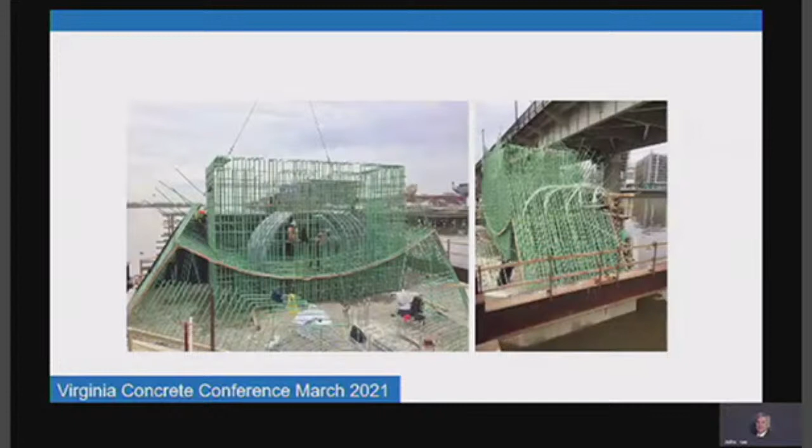This gives you a nice image of the V-pier at what we call the knuckle. You can see the very complex geometry and the forming that went into this. The contractor never complained about this—they did a great job with it. You can see the rigid galvanized PT duct coming out of the footing and into that lower knuckle, along with all of the epoxy coated reinforcing steel. The image on the right is just a side view, showing all of the duct ports for grouting coming out of post-tensioning.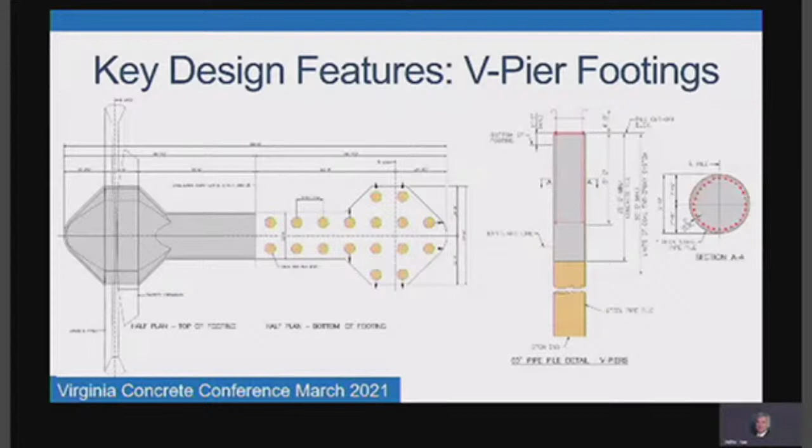And then the V-piers themselves were supported by waterline footings, 180 feet long by 48 foot wide, 9 foot deep typically, except for that knuckle area, quite a bit deeper. And they're supported by 36 steel piles that are concrete filled down to mud line. And we reinforced the concrete fill because we had the reinforcement come up into the footing to create a fixed moment connection. Again, remember, these are not thrust arches, although I guess at the abutment we do have a thrust force going into the abutment, but these are springing arches coming off these footings, so we needed that fixed moment connection.

So we look at the piles themselves. These are steel pipe piles, 1 inch thickness. 1/4 inch of that 1 inch is sacrificial, along with 2 coats of coal tar epoxy on the outside. Contractor did use spiral welded. Nominal driving resistance, 1,700 tons at the abutments, 2,000 tons at the V-piers, right around 100 foot long. And we did use statnamic testing as well as PDA testing. We used 2 statnamic tests to verify the capacity of the piles, and they proved to be very effective and efficient in doing that.

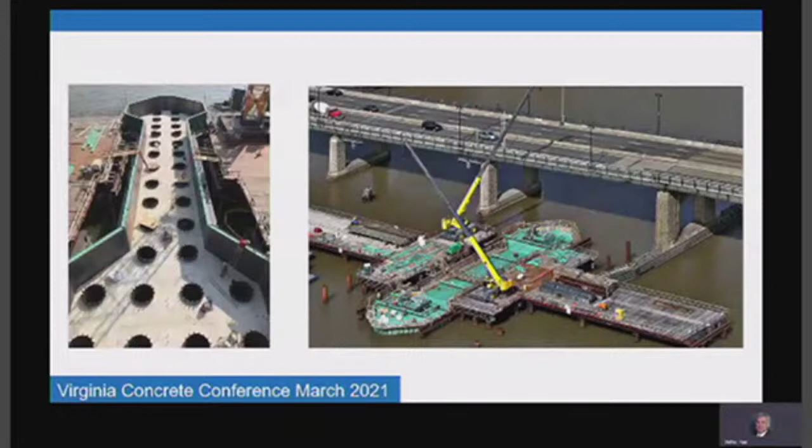And then these were very large pours as well, 1,700 cubic yard placement. Took 17 hours to place. And this was a 70% slag mix. And so we were able to not use cooling tubes for these because of the slag mix and the way this concrete was poured.

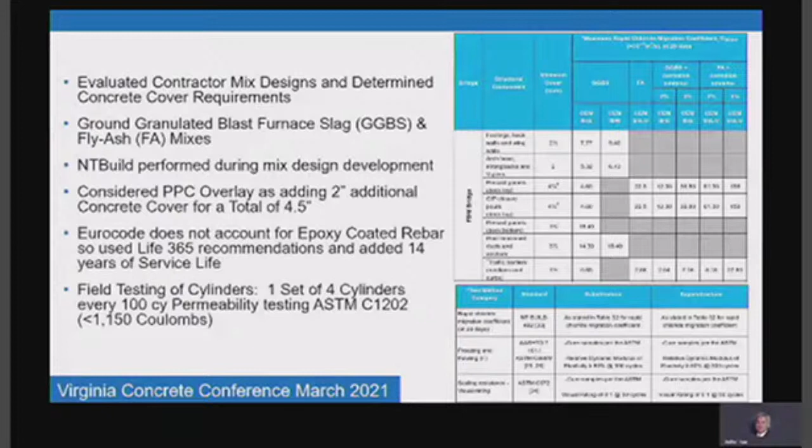And then the application and the actual testing in the field the contractor has to do is basically that for one set of 4 cylinders every 100 cubic yards, they do what you're more familiar with in the permeability testing in the ASTM C1202, and again it has to be less than 1,150 coulombs.

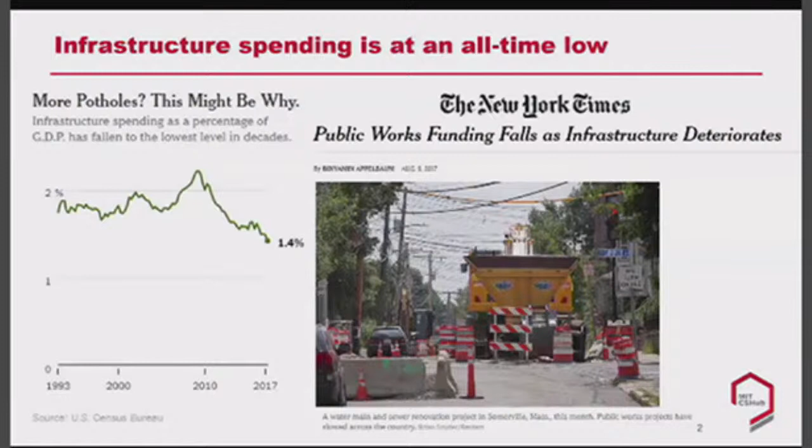And one of the ideas that was proposed to us about how we might do more with less is to increase competition among product substitutes, because that could lead to lower prices. And before I get into what that means for the paving sector, I just want to make sure we're clear on definitions here, because for us, a substitute is a product or service that satisfies the needs of a consumer that another product or service fulfills.

Now, when it comes to paving, our question was whether or not the presence of competition between material substitutes would impact pavement material prices. And the terminology that I'm going to be using here is intra-industry competition. That is between firms that pave with the same material. So for example, if a job goes out and it's already been decided that it's concrete, this would be about competition among all the firms that are bidding to pave with concrete. And contrast that with inter-industry competition, and this is between firms that pave with material substitutes. So this would be bidders on a job that could go either concrete or asphalt.

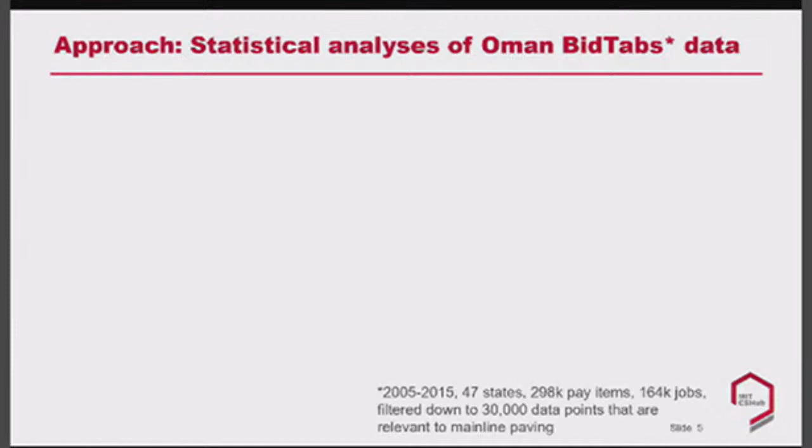Then once we had all the prices in there, we looked at a whole bunch of data for different characteristics of those projects. So for example, we looked at what's the project size, meaning the quantity of paving materials that are used; what's the overall market size in the state, and our metric for that is annual spending; are price adjustment clauses used, which is really relevant to asphalt only; what's the number of bidders on a project, and that was our metric of intra-industry competition; and then lastly, what's the dominant market share, and our metric for this was the percentage of spending on asphalt concrete. This was our metric for inter-industry competition.

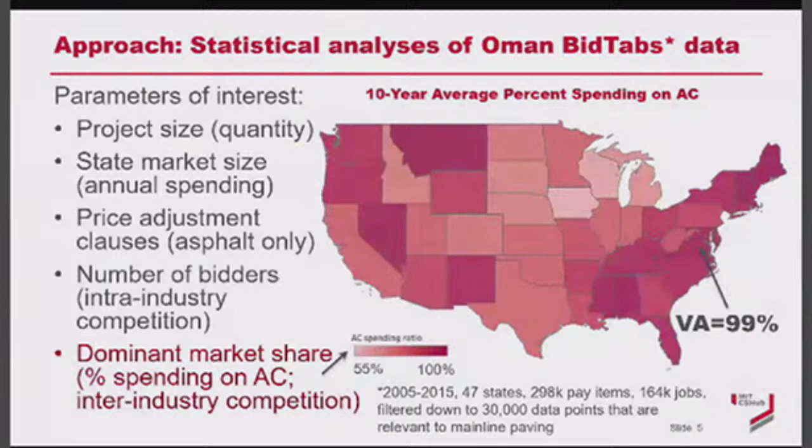So once again, we see that the statistical model shows there is a large impact of inter-industry competition on unit prices. We were then curious how much we could take that information and translate it into a model where we can estimate how much of an impact it would likely have on paving prices. And so we took that data and created an estimate where we could say, like we have here, for a state spending an average of 5% on concrete, an increase to some other level of concrete market share would have decreased paving costs by this amount.

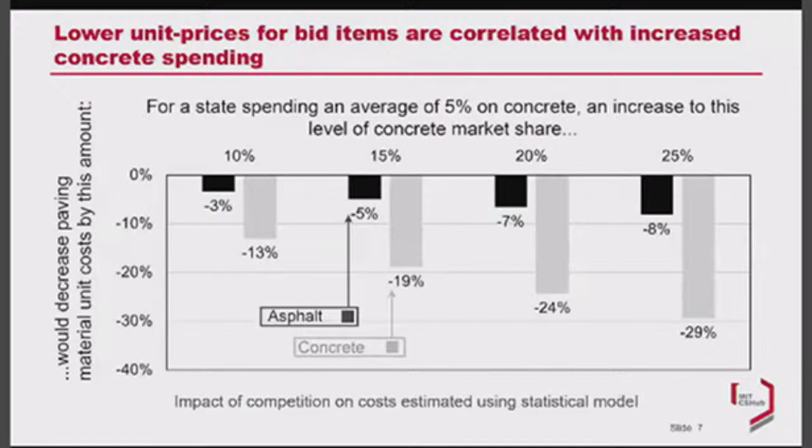So for example, if we started with this 5% and then increased concrete spending to 10%, our model estimates that asphalt prices would decrease by 3% and concrete by 13%. And you can see that continues all the way up here. Clearly, there's a larger impact on the concrete prices than the asphalt prices. So once again, this is looking at all the data across all the states, and is a way for us to try and understand what could be the impact of changing prices using this statistical model.

The other thing to keep in mind is that what we have here is a correlation between these parameters and prices. So we can feel pretty confident saying that, based on the historical data we have, that correlation exists. But the next step is to try to understand correlation versus causation. We see that correlation, but we want to better understand what might be causing it and what factors you would change in order to see whether that's really true.

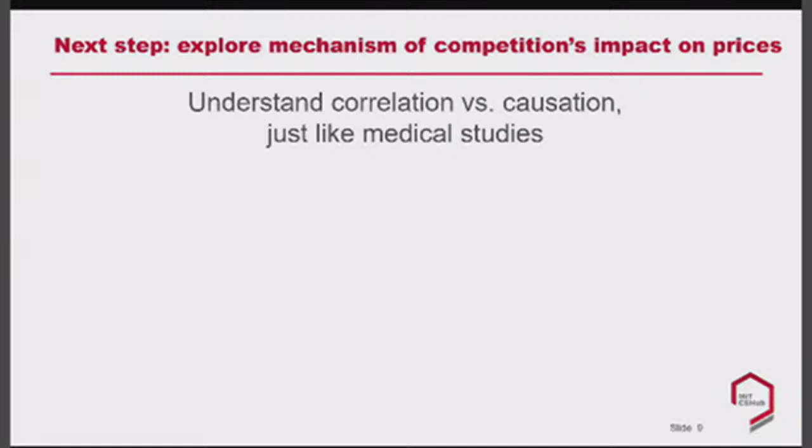And we see this happen a lot in medical studies. There are a lot of statistical analyses that show a correlation between smoking and lung cancer, or exercise and mental health, or a healthy diet and life expectancy. The statistical models show that, but the next step in all those studies is to do more science to understand what could be the causation, and that can lead to guidance on prevention or other objectives. So I think we have a similar opportunity when it comes to competition. We see this correlation. What are some of the best mechanisms to implement that and actually act? And that's where we see a lot of opportunities going forward.

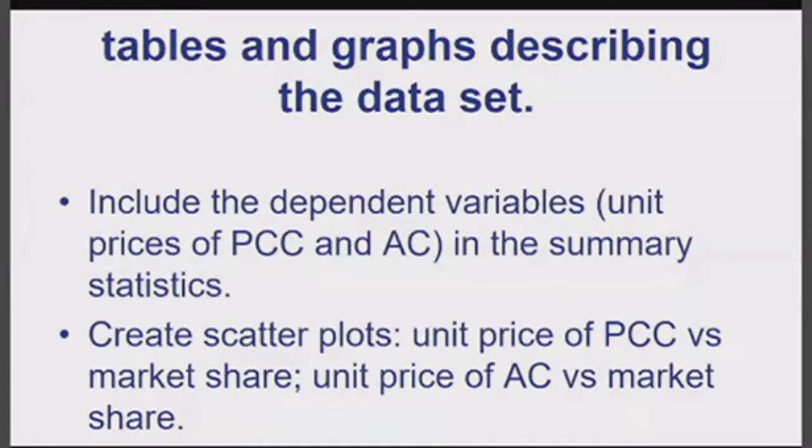My second question would be, could you tinker with the specification, that is, the regression equation? To be clear, I consider the comments from this point on to be directions for future research. The investigators already did a lot of conscientious work. I'm not suggesting they need to put more into this paper.

The investigators have made a great many analytical choices that are as good or better than anything that I could or would have done. The treatment of the number of bids is one example. The functional form 1 over the number of bids has a simple, solid theoretical basis. Any functional form that had a more sophisticated theoretical basis would be a lot more complicated. This is just great.

Now, why not use the same functional form for the contract quantity variable Q? This is to reflect economies of scale. If the vendor's economies of scale can be traced to fixed costs, then the reciprocal 1 over Q seems a more natural mathematical form than logarithm of Q.

The variable the paper calls market size is really lane miles in the state system. I have two things to say about this variable. First, it appears to be another sort of scale factor. It's to reflect that a 1% change in asphalt's share of the pavement budget means more in a big system that buys a lot than in a small system that buys a little. This being the case, to introduce the effect of market size in an interaction term, market size S times market share, may be a more natural specification than market size as a standalone variable.

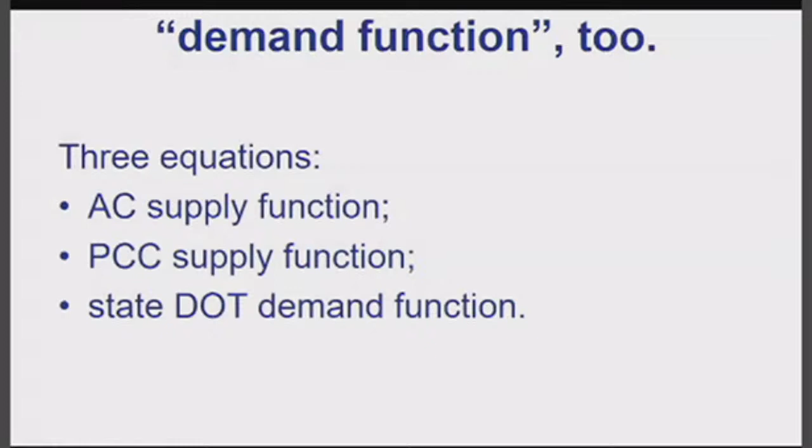It is appealing, I'd say almost irresistible, to consider dealing with this issue head-on by estimating a system of three equations: one equation to describe the behavior of the asphalt contractors, one to describe the behavior of the concrete contractors, and one to describe the behavior of the state highway agencies.

My last pair of questions would be requests for more data and more results. It would be valuable to see whether the analysis of an expanded data set, still based on the Oman BidTabs, corroborates the pattern reported in this paper. Additional variables, such as those I mentioned earlier—topography, soil, climate, traffic volume—might reduce the noise in the regressions, and they might be needed for identification of a three-equation system that included a demand equation.

It would also be valuable to see whether the analysis of a different data set corroborates the pattern reported in this paper. By way of example, I'm told that West Virginia DOT has committed to buy more concrete pavement in the hope of getting more bang for their buck. Perhaps at some point we can look for data describing the outcomes in West Virginia. That's all. Thank you.